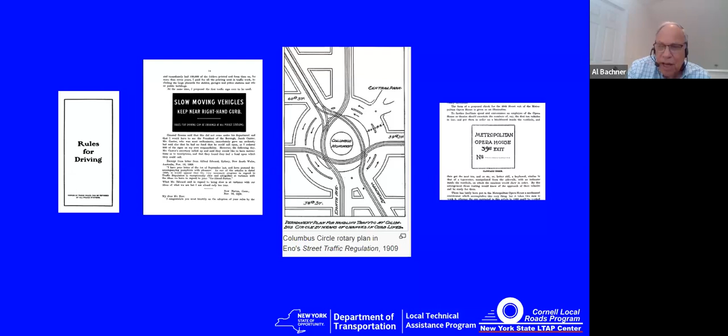And he was the first one to suggest making it one way and thereby organizing the circle and limiting the conflict points. And then he came up with the idea of guide signs, and there's an early guide sign. So safety and warning signs and regulations. Now the shape of the sign.

The stop sign, why is it 8-sided? Why is the railroad warning sign round? Well, the belief was that they wanted to communicate the hazard that might lie ahead. And the feeling was that the more sides a sign contained, the more important the sign was to the operator's safety. So they gave the stop sign 8 sides.

Railroad sign, well, that's a circle, but you mathematicians know that a circle is considered as having infinite sides. So that was a very hazardous location that they wanted to identify. Now, out of Eno's work came the evolution of the MUTCD. And here we can see, starting in 1935 up to our present day national manual, the evolution that took place.

Early stop signs. Notice the stop sign in the middle has those glass stones. And that was the beginning of something called retroreflectivity to make the signs visible at night. And then in 1954, the color of the stop sign changed.

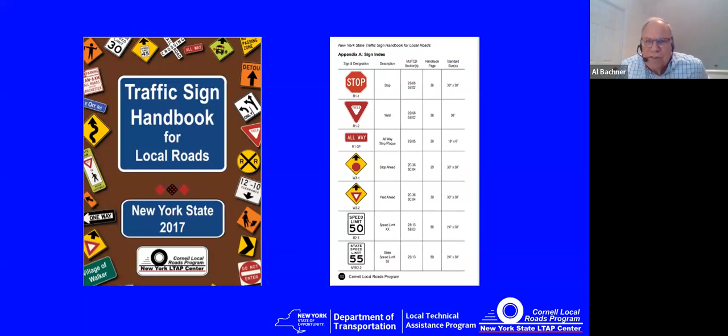So it gives you a lot of information right away, and it can be used as an index to the national manual. Back in the day when we had the state manual, Cornell did a great job because they had another column here that listed not only the national manual, it also listed the state manual's sections, as they weren't correlated at that time.

And I know Amanda sent out a tab for you to secure your PDF file so you can download it and print it out or save it to your phone and have it with you all the time. And it will show you how to get it free if you haven't taken note of that. Go to the Cornell Local Roads website, and navigate to the free Manual on Uniform Traffic Control Devices and the supplement.

You go to the Cornell Local Roads website, hit publications and resources. It's a pull down menu. Then go to all resources by category, left click, safety, left click, scroll down to MUTCD and the supplement, and you can download it. And this is what you would see when you're on their website. When you go to publications and resources, all resources by category, and then you'd hit safety and you'd be there.

And signs. Well, they should fulfill a need, command attention, convey a clear, simple meaning, and command respect and attention. And they need to give time for proper response. Signs aren't like holiday decorations that we just install and put up and take down.

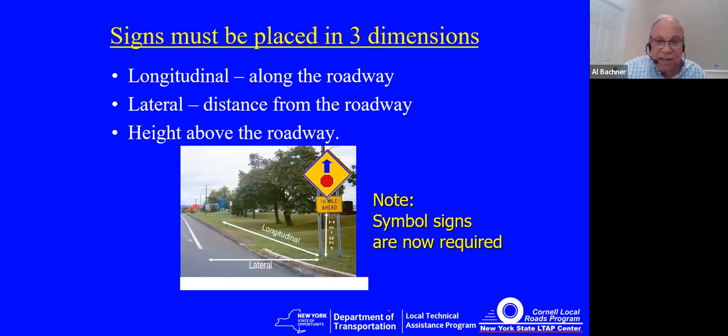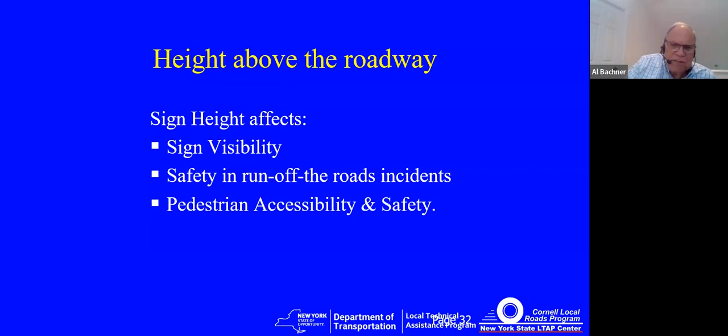The sign height above the roadway. Notice it's the height above the roadway, not above the ground. It affects visibility, safety and run off the road incidents. We'll talk about that a little bit as we go along. Pedestrian accessibility and safety. We have a good picture to show you on that. And here we have some shots out of the manual showing us what the sign heights are. Notice that they're measured not from the ground, but from the height of the roadway to the bottom of the sign.

Now, this is very important when you're doing work zone signing. Some of you have work zone sign stands that are just 1 foot above the ground. They display the bottom of the sign 1 foot above the ground. They're fixed. And that's okay, because work zone signing is for temporary conditions, that meets the standards of the manual. But it's 1 foot above the roadway, not above the ground.

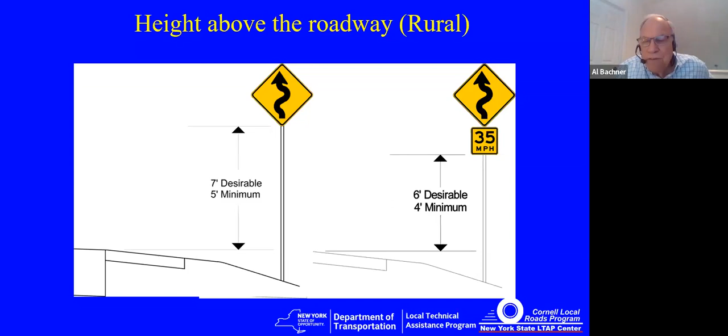So if we were putting a work zone sign in the situations where these warning signs are, notice that the shoulder drops off, or the roadside drops off, and the sign would be 1 foot above the ground, but not 1 foot above the roadway. So check that off on your list.

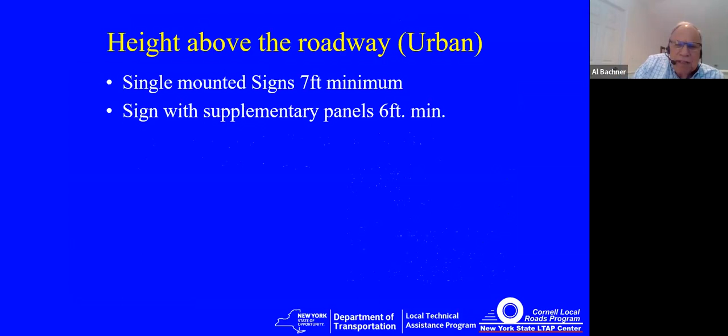And the signing above the roadway, again, this illustrates why we want the bottom of the sign a minimum of 7 foot above the roadway. Notice this is a pathway, that's a parking lot in the back, and vehicles parked back there walk up this sidewalk to get to Main Street. And the top of the sign needs to be 9 foot.

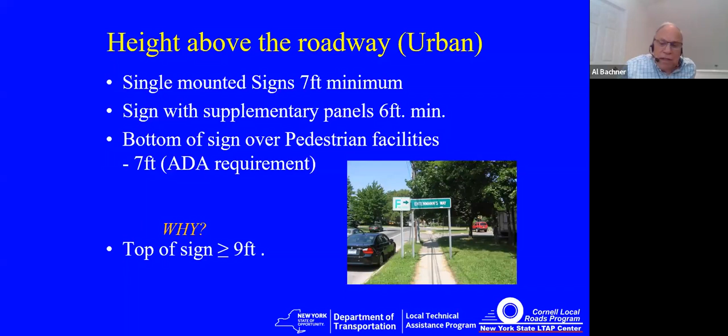Why 9 foot? Well, if an errant vehicle hits the signpost, it would bend and the sign would bend down towards the car. If the top of the sign is 9 foot or greater, then the sign will strike the roof of the car, and the broken signpost and sign will pass over the top of the car without harming the occupants of the vehicle. If the top of the sign is less than 9 foot, there's a pretty good probability that the sign, as the signpost bends, will cut through the windshield and through the passenger compartment like a hot knife through butter.

Now, how do we place signs along the highway? How far off the highway? Well, 12 foot from the edge of a travel lane where we have a shoulder that's less than 6 foot, and 6 foot from a stabilized shoulder where the shoulder's 6 foot or greater. So in both those cases, the sign is getting 12 foot off the edge of the travel lane.

Now, naturally, you have constricted areas where you can only place signs on your municipal property. You can't go back onto private property. So you'd have a constraint there, and you can only put the sign as far as your right-of-way allows you.

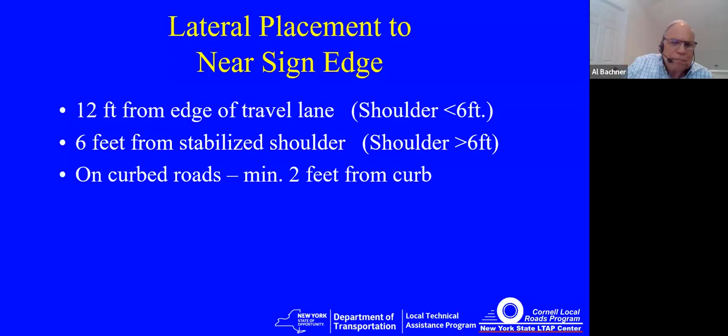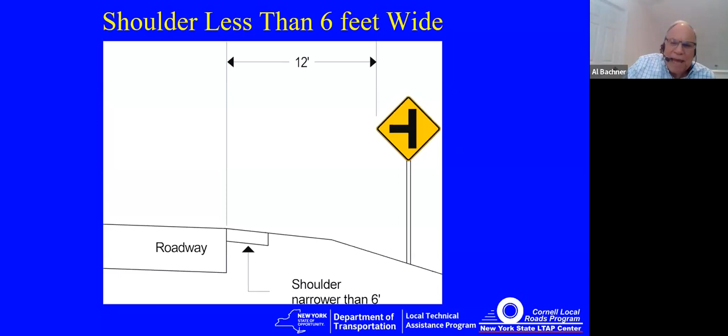On curbed roads, minimum 2 feet from the curb. Let's take a look at that. So notice the 12 foot is not measured to the center of the sign, it's measured to the near edge of the sign. So when you're putting in your signpost, you've got to do a little bit of math to figure out where to put the signpost. And 2 foot minimum from the edge of the sign to the face of curb.

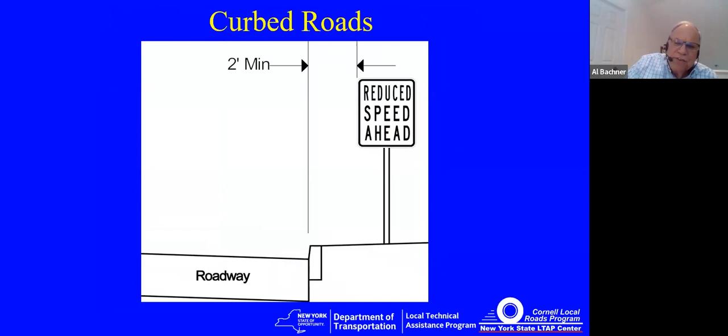Now, why is that? Well, let's take a look. What's happening to this sign? Well, it's too close to the roadway. And there's no curb here, but it illustrates the problem. What's happening is this sign is probably getting impacted by either mirrors on buses or trucks. It's pretty high, so I doubt that passenger vehicles are hitting it. Or as the vehicle is turning, the turning radius of the vehicle, the side of the vehicle is scraping that stop sign.

And as a highway official, you may look at that and say, that's got a low priority to go out and correct that. But think about a school bus coming to this intersection and the bus windows being open, and those young students just returning from a victory football game, all waving out the window at their fans along the side of the road, and not paying attention. And as the driver swings around this corner, a young student could lose an arm. So this is an important thing to take care of as you see this along your highway.

Longitudinal placement. Where do they get placed along the highway? We want to locate them to be seen. And notice here the stop sign has a street name sign above it. That helps give the motorists some idea of where they are, and that's a legal posting under our manual. Locate signs to provide time for proper response. So this sign, an intersection ahead sign, is also telling us the name of the intersection ahead, and that's a legal posting. And notice that the supplemental panel is also in yellow with black legend.

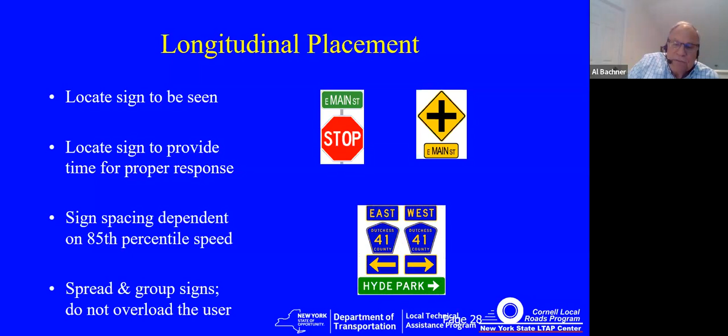And then we may have to put up multiple signs. We want to spread them out, and that would depend on the operating speed. 85th percentile, we're talking about operating speed. And we want to organize the signs. The motorists will go down, they see a totem pole of signs, and which one's important to them? Here it's easy for them to pick out the sign that they're interested in and the direction that they want to go. Here's some groupings that may not be so well thought out. So think about how you're placing your signs.

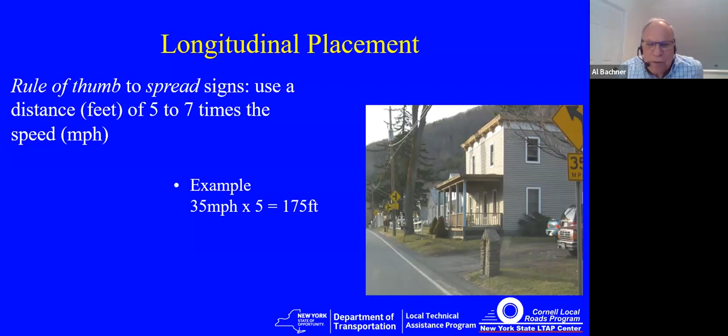And here's a village, and there's at least 5 warning signs posted. Take a look in the top right-hand corner is the first one. That's a curve warning sign. There's an intersection, another intersection. Then there's a firehouse warning sign further down. And here, the superintendent or the highway department laid them out nicely. They have them separated. And the general rule is 5 to 7 times the speed limit. So the example here is 35 miles per hour times 5, about 175 feet between signs.

Now, our regulatory signs, longitudinal placement, are generally placed where the regulation applies. So that's pretty simple. We look in a manual and it tells us where to put the signs. And if we look up the stop sign, here's another example of how to use the manual. We might go to the Cornell Traffic Sign Handbook, and we'd see that section 2B.10 is where stop signs are covered. So then we open up the National Manual, we read that, and it tells us where to put a stop sign. But are we done? Well, let's take a look. What about the supplement? Well, we look up 2B.10, and we find that there's more information there. So we have to take that into account before we place the stop sign.

Warning signs, their longitudinal placement. Well, we've got lots of warning signs, and we've got to think about how they're placed. We're generally looking at the driver's reaction time.

And you young guys all playing those video games, you've got really fast reaction time. Now, I play video games, but my video game is solitaire, so my reaction time's a little bit slower.

But these reaction times, they're not what we have to consider for a driver. What happens with a driver? Many times our drivers are distracted as they go down the road. They're doing different things. They might be imbibed in alcohol or drugs. And where do children sit now? They sit in the back seat, facing the rear of the car. Well, they're much safer there. But when that child starts to act up, mom and dad's attention go right to the child and leave the roadway. So these distracted drivers, they have a reaction time of 2.5 seconds.

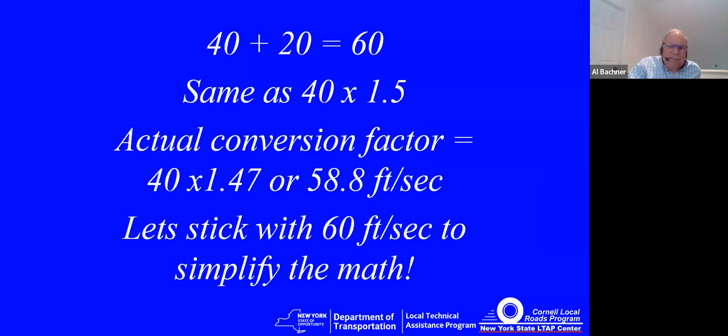Let's take a look at what we've done here. 40 plus 20 is 60. Well, that's the same as taking 40 and multiplying it by 1.5. That would be called a conversion factor. But the actual conversion factor is 1.47. So 40 miles per hour would come out to 58.8 feet per second. I think a reasonable person might round that off to 60. So let's just stick with the 60 feet per second to simplify the math.

So now what's the distance traveled in that 2.5 seconds of distracted driver time? 60 feet per second. The first second they travel 60 feet. Another second they travel another 60 feet. And a half a second they travel 30 feet. So the vehicle's traveled 150 feet just for the person to notice that that condition is ahead. That's 150 feet for them to get their foot from the gas pedal to the brake. The vehicle has not begun to stop. In order to calculate the full stopping distance, we'd have to go through something called Newton's laws to calculate the stopping distance.

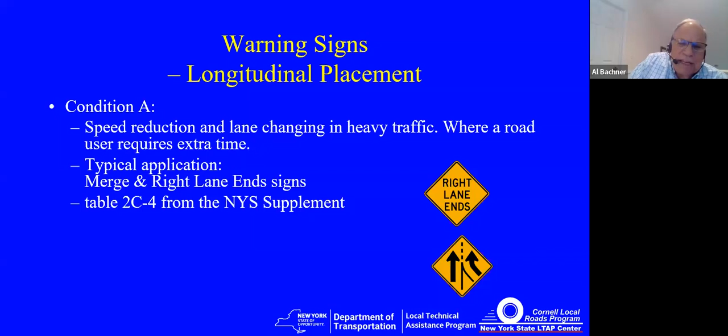So, do we need to do these mathematics every time we want to post a sign? Absolutely not. The manual does it. It does it for us. As we enter the manual, we'll see there's a condition A, and that's where vehicles are merging, changing lanes. These are some examples. And we go to table 2C-4, and we'll find that in the New York State supplement. And here we go down condition A, we come across at 40, and it tells us those signs need to be 825 feet. Now that's a should.

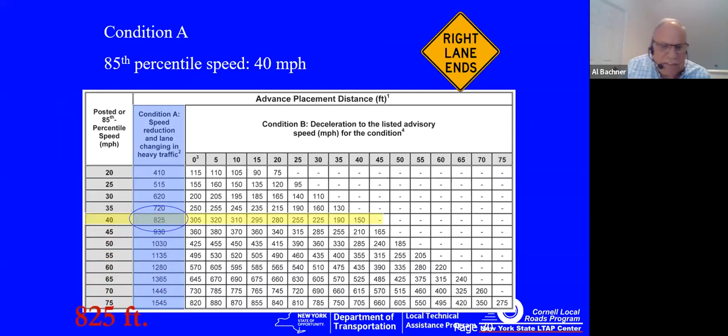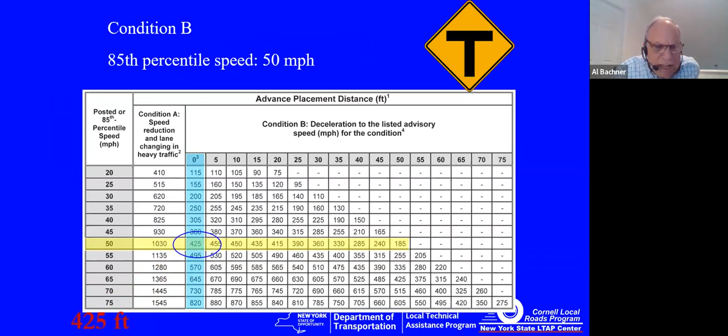What happens with condition B? If there's a condition A, there must be a condition B. These are examples of condition B, where the motorist has to adjust their speed to an appropriate speed so they can safely and comfortably negotiate the obstacle or the condition in front of them. And again, we go to the same table. We go down for the T intersection. They may have to come to a stop. So we go down, 0 would be the advisory speed. We come across, in this case, was 50 miles per hour that we're traveling at, and we get 425 feet is the advance posting.

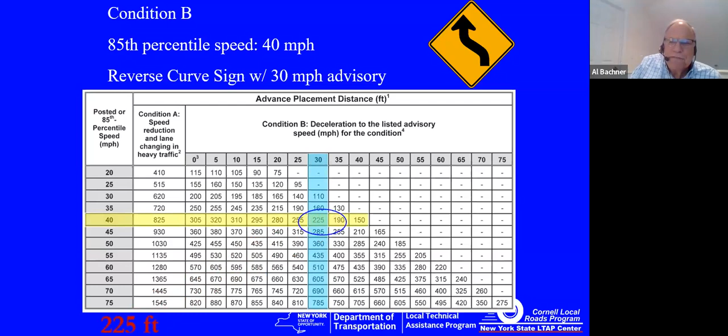What happens with a curve warning sign? They don't have to come to a stop, but through some means, we allocate what is the safe operating speed, maybe a ball bank indicator, and we find that it's 30 miles per hour. We come across at 40, we read 225 feet, and that sign should be posted 225 feet of the first curve.

Guide signs, they have a lot of flexibility. And with guide signs, we refer to the manual. Where should we place them? They're usually less critical than regulatory and warning signs. And you adjust those before you adjust other signs on an arterial highway, non-freeway. Warning signs over regulatory signs, warning message of greater hazard over lesser, regulatory next in importance with most important regulation supersedes others. And guide signs we normally have lots of flexibility in.

Did we get any questions? Did I bore the shoes off everybody? Anybody still out there? No questions. You covered everything. Okay. Well, and it looks like we're running pretty good on time.